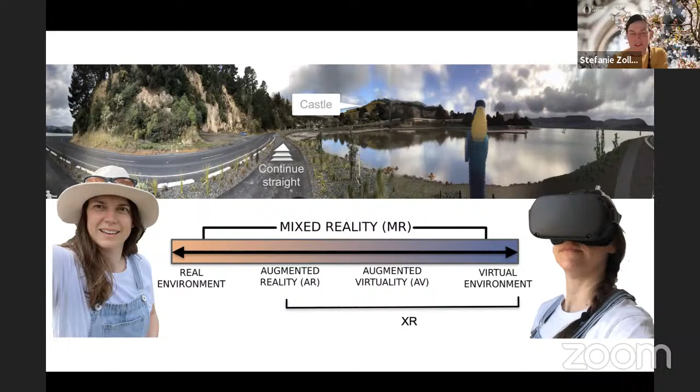Then we move further along the continuum, and here we have augmented virtuality, which is a virtual environment that still has real information embedded - for instance, videos of a real environment integrated into a virtual one. Once you're replacing everything, all the real environment, with completely virtual content, you're basically in the virtual reality, virtual environment area. We talk about mixed reality when going from real to virtual, and people often define XR, cross reality, extended reality, as the whole area from augmented reality to virtual reality. That's basically where I'm very much interested, and most of my research is in this area.

Just a couple of examples here from our very nice campus at Otago. An example for augmented reality would be: we have a historic photograph, and we integrate a 3D representation of it on top of the view of the real environment. We display this on top, which allows us to explore a location and look back into the past - that's a use case we explored here. People can walk around our campus and see how the buildings looked in the past, getting this kind of view back in time.

In contrast, if we're talking about virtual environments, we have a completely virtual representation of the environment. In this case, we have a virtual representation of our campus, and the user can navigate through this environment, maybe looking at it in a virtual reality headset, so they can't really see anything that is actually there. They wouldn't be on the campus, but based maybe at a different location, and they can still explore the virtual environment there. That's basically how we're traveling along the reality-virtuality continuum.

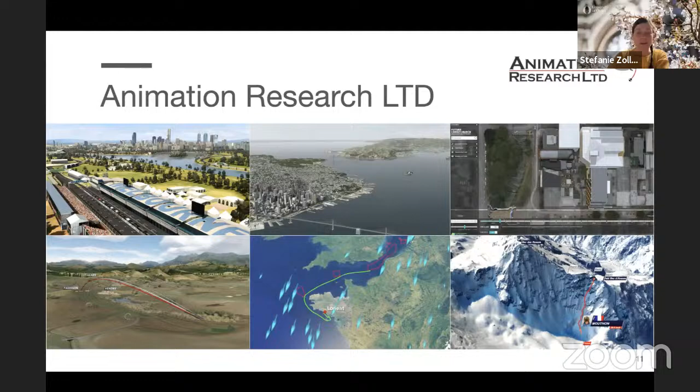For instance, sailing, lots of golf tournaments, and they're really big in cricket visualization and cricket broadcasting. So I worked on a lot of really interesting sports, doing sports broadcasting and sports graphics, and this was all broadcasting, with lots of processing happening in a post-production step, but with a very fast turnover.

When I was working for them, I worked on a project looking into how we can visualize snowboarders and skiers going down really steep mountains, which is really hard to follow live. If you're standing there as a spectator, you might just want to watch the slopes, but it's really hard to actually see where the riders are going down the mountain.

So what we were doing was equipping the riders with GPS sensors, and then using tracked helicopter footage, visualizing the GPS tracks on top, which allowed us to integrate different statistics like speeds, how steep the angles were, what kind of tracks they were choosing, and having them in a side-by-side visualization.

For me, this was really about this whole topic of how we can enrich sport broadcasting. If we look back at the past, you would maybe just watch a football game, and back then there wasn't so much additional graphics. I think if you look at the last years, what happened in terms of sports technology, sensors, and high performance computing...

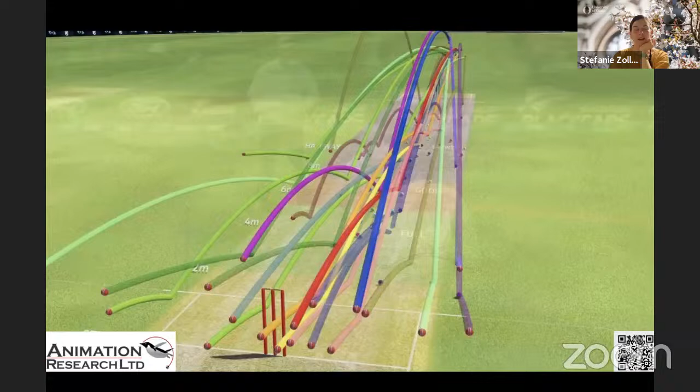How can we track a ball and then visualize this in a 3D flight path? We also looked into visualizing this in different types of arcs and visualizations, which can be quite helpful.

That's an example where this was demonstrated with some kids during a tech week here in Dunedin, where you can track the ball and visualize it directly in a 3D representation, to get a better understanding of how the actual flight paths of the balls were.

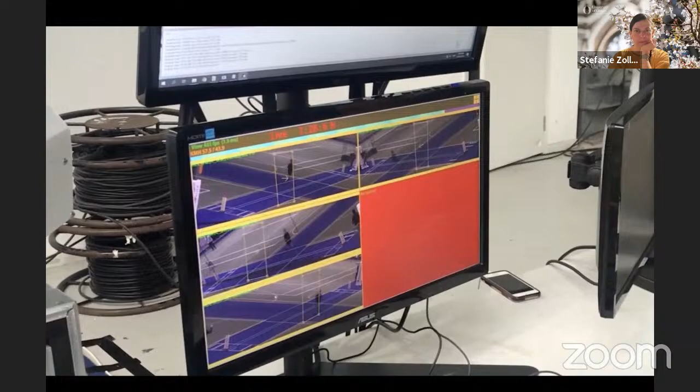So at the end, you basically end up with this kind of 3D representation, and you could compare the different flight paths here.

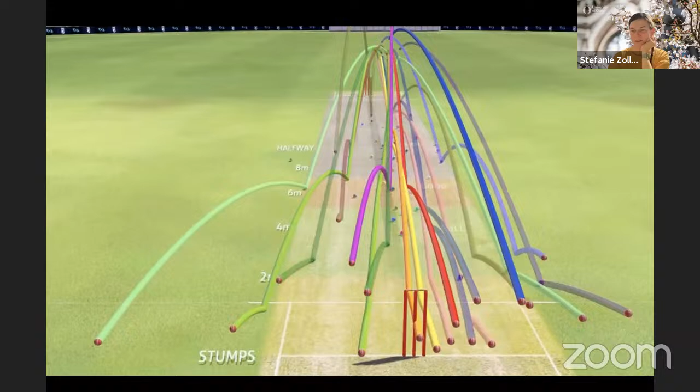So that's all broadcast, with a big focus on broadcasting technology, but I thought this also has a really huge potential for enriching live sport activities.

For instance, if you look into sports spectating, like going to a match and sitting down in the audience, often there's not a lot of additional information you can access. You might take out your phone and access box score data, but it's certainly not the same as what you'd expect from broadcasting.

For sports training, a lot of people nowadays do video training, for instance using YouTube for instructional videos. In gyms, you often have pre-captured videos that you can access remotely, from home, and then follow the instructions to get your training session.

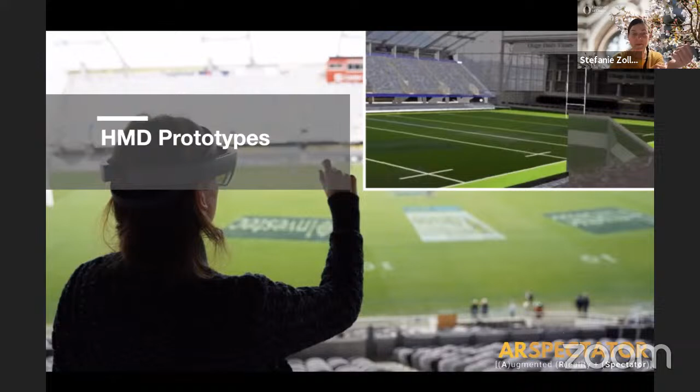We also looked into different HMD prototypes - for instance, we were using the HoloLens back then, a couple of years ago. The advantage was that we have full flexibility where the user can really move around and don't have to take the phone out, but it's still a bulky device.

For the AR training on the AR coaching project, we then switched over to the Quest 3. The first feedback we got was that compared to mobile phone prototypes, mobile phones would not be suitable, since you can't really perform all the actions and follow the instructions because you need full body movements. So for this AR training, we looked into using a Quest 3, or we also worked with the spectacles from Snapchat, which is a very nice lightweight option to integrate this into a training workflow.

This brought us to the challenges around localization and tracking problems, because we need to know where the user, or the spectator, and each of the spectators, is located within a really large environment. If you're looking into a stadium, for instance, or even a gym, it can actually be a quite big environment, and we often deal with users that are just seated.

They don't really move around a lot, which is very different from the standard use cases we have for augmented reality users, who are often just exploring a smaller space and accessing information about, for instance, a living room, placing some furniture. In this case, for the stadium, you really have to cover a very huge area, which is a big challenge for any localization and tracking algorithms, particularly because these kinds of environments are also dynamic.

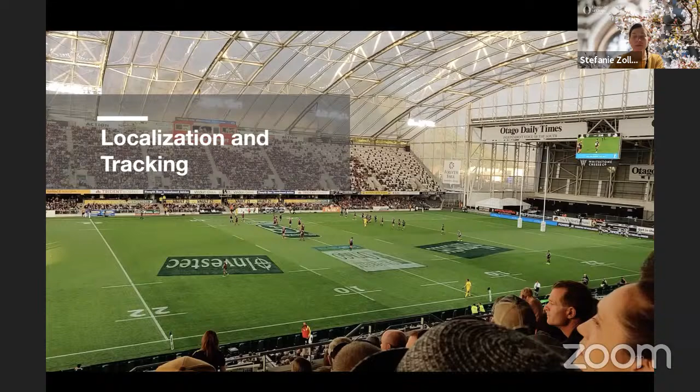And the problem here is that if you look again into what the usual movements are, we can see that there's only a very small baseline. And if you've worked with SLAM algorithms before, often the requirement is that you actually have to have a wide baseline to have a nice initialization of your algorithm, which is not the case for the use case that we are working on here.

And it's not only the case for sports spectating, but also if you look into, for instance, tourism, where people are basically trying to access information about a location, maybe some sightseeing. Often they just stay static in one position and then just move their phone around. It's not often the case that people are just browsing while walking, because it's actually a bit too dangerous.

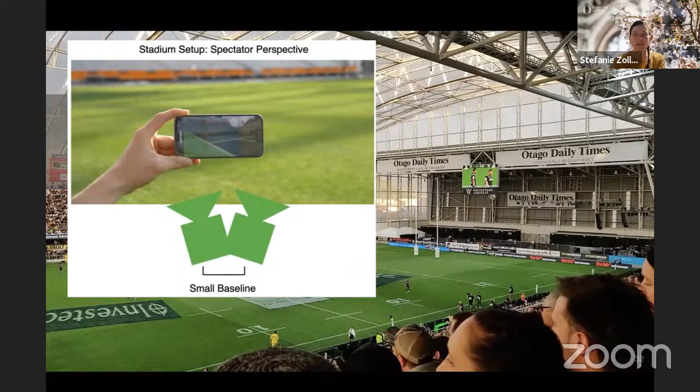So we really run into this kind of problem of having a small baseline here, and in our work we then addressed this and actually turned this kind of disadvantage of having a small baseline into an advantage, because we noticed that often users of AR applications are standing static, and then they just move around on a circle, because they often just move around their arm.

We then integrate this as a prior into our localization and tracking algorithm, basically assuming that the user is moving along on a sphere. This allowed us to implement a spherical perspective 2-point algorithm, since we know the translation is always fixed and we basically just move around on our sphere. This reduces the amount of unknowns, so we can compute good results in terms of pose data using a 2-point algorithm.

This also allowed us to implement a keyframe sphere. If you look into traditional SLAM algorithms, you often have a keyframe map that's basically unrestricted, so the keyframes can be everywhere. But in our use case, where we assume the user is always moving along a sphere, we can reduce the space to just having keyframes along a sphere, which reduces the space we have to sample and search for.

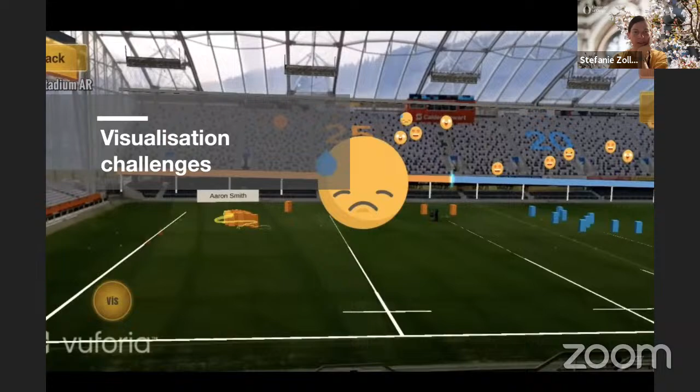Just to visualize—if we have too much going on, it could be a bit of a challenge here.

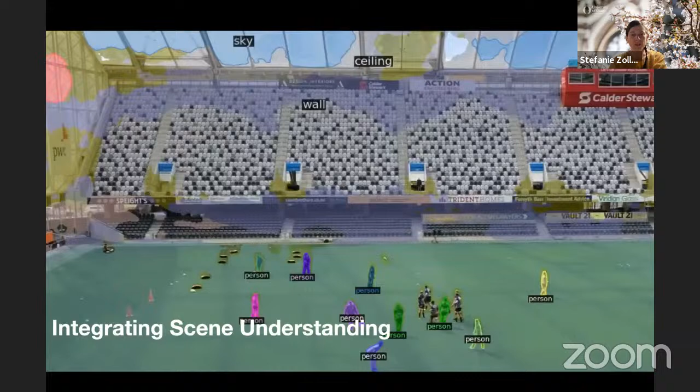To address this, we looked into situated visualization specific for sports. We try to analyze what are the best surfaces in the 3D environment of the user—for instance, the play field, but also the other spectator stands—in order to integrate additional information. We integrated scene understanding, analyzing the 3D environment like a 3D model of the event site, in our case a stadium, combined with scene understanding from the live footage, analyzing where's the grass, where are the other spectator stands, integrating this into our visualization methods to make sure we only display content where it's really suitable.

We also looked into the different types of information we can visualize. For instance, world reference data—you might want to visualize the different scores, supporting the user by showing which team is playing on which side. In addition, visualizing events and providing explanations. There might be live tracking data from the players coming through, where you also want to visualize additional information, and we try to analyze the best location for displaying this kind of content.

We also looked into combining this with more traditional visualizations that come from broadcasting, so just a 2D screen, and then integrating this together with situated visualizations that are integrated into the play field and visualized on the field and on the players.

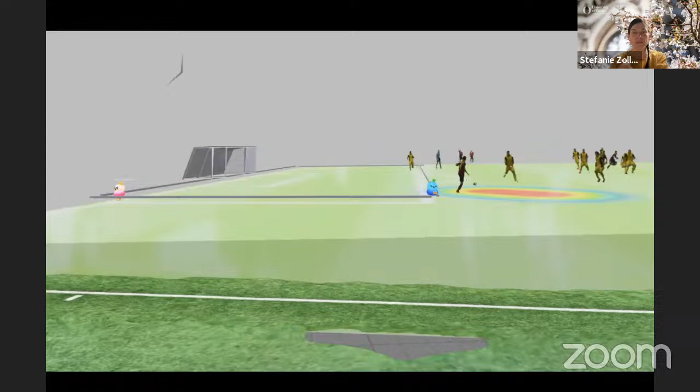We also looked into how we can visualize time and event-based data. For instance, if you have spatial information, where we often get X and Y coordinates from a game, we can visualize the events where they're actually happening on the field by displaying them in the overlay. This makes it easier for the user to understand where the event is happening.

We also looked into how we can make use of the context of the user, because often people are not just following the action on the field. Sometimes they're browsing around, and in other cases they might want additional information. You can analyze the movement behavior either by eye tracking data or by following the movement of the headset, and use this to analyze if they're more focused or agnostic and browsing for more information.

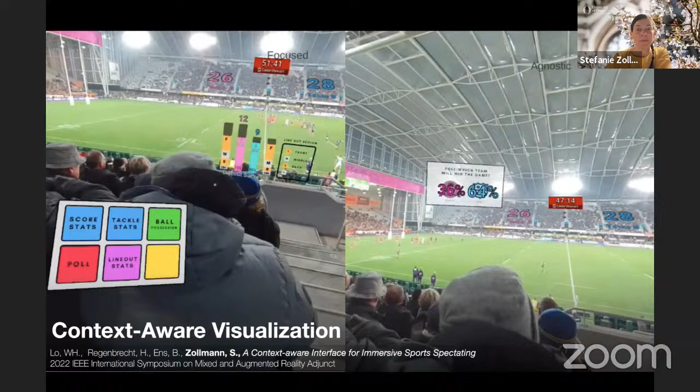Depending on this, we looked into integrating a level of detail visualization to show more or less information and make the experience more customized for each user. This is showing our level of detail framework. Depending on if they're focused, we change the level of detail and display more information. If they're not focused, there might be quizzes displayed to keep them entertained and engaged with the sports experience, similar to what we know from mobile phones.

One of the last topics I'd like to discuss is the challenge around dataset generation or capturing, and how to run experiments in these kind of challenging environments. We had to capture lots of datasets for creating our 3D environment, but also for training our networks, and then also for doing our testing.

We followed a very good plan in terms of capturing our data, making sure that the lots of different devices we used were aligned to each other, and this provided us with really good reference data that we later used for our experiments.

For the training use case, we also looked into different types of dataset capturing. In particular, we looked into egocentric versus exocentric data capture, where we looked into possibilities for capturing training data where the instructor is moving around a lot, so we can't really follow them with a camera. By having this kind of attached setup with a 360 camera, we captured footage and used this to extract a 3D avatar that was used for visualization purposes.

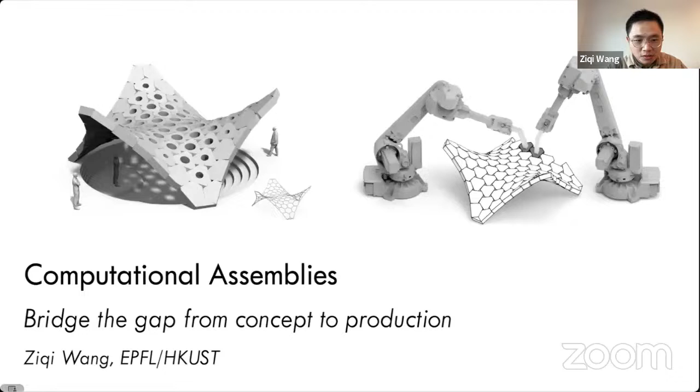Thank you very much for the introduction. Let me share my screen. I think this one is okay. Yeah, let me know if it's not. So thank you very much for the introduction again. I actually have the same surname as the host. I'm also called Wang, and my first name is Ziqi.

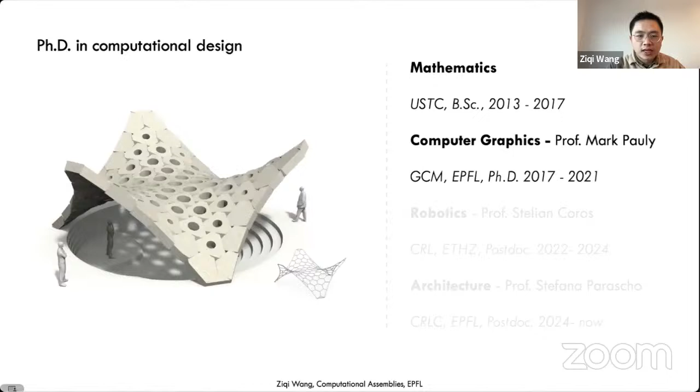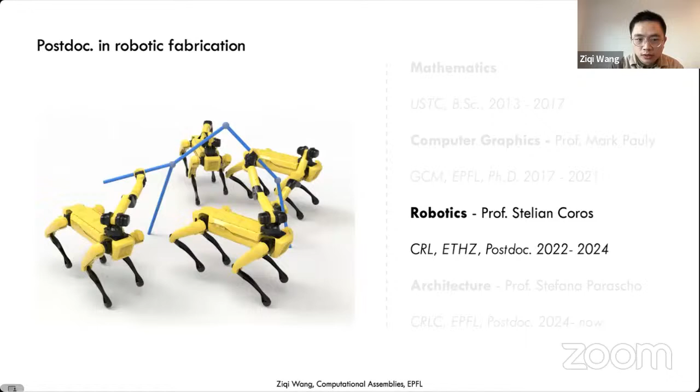Today my talk is mostly about computational assemblies. Before introducing that, I want to do a quick introduction of my education background. I actually did mathematics during my bachelor degree. I moved into computer graphics because Professor Li Gang Liu introduced me to the field, and later I started my PhD in a graphics lab at EPFL, where my professor is Mark Pauly. Most of my PhD research focused on designing architectural structures using geometry modeling methods. Later on, I realized if I can design interesting architecture buildings, can I use robots to build them? That's why I joined Professor Stelian Coros's lab at ETH to use robots for building the structures we design. To actually build something interesting, that motivated me to join a true architecture lab, also with people from controls. So I worked with Professor Stefana and Professor Maryam to apply the knowledge we learned from the past to build structures using robots. I will soon join HKUST, the Hong Kong University of Science and Technology, as assistant professor, where we want to develop algorithms for both designing and fabricating complex assemblies. So we named our lab the Computational Assemblies Lab, and we are currently looking for PhD students to work with us if they're interested in either digital fabrication or robotic assemblies, or in general geometry related research.

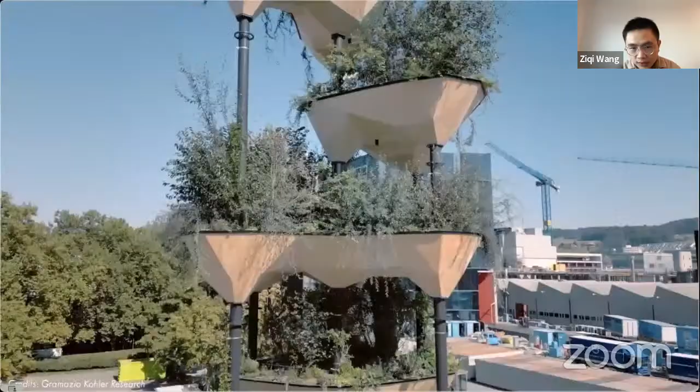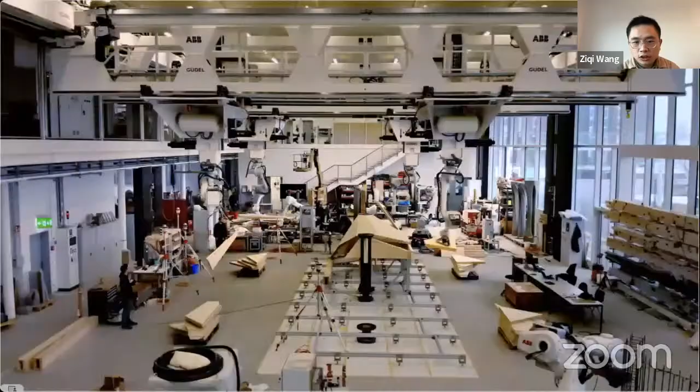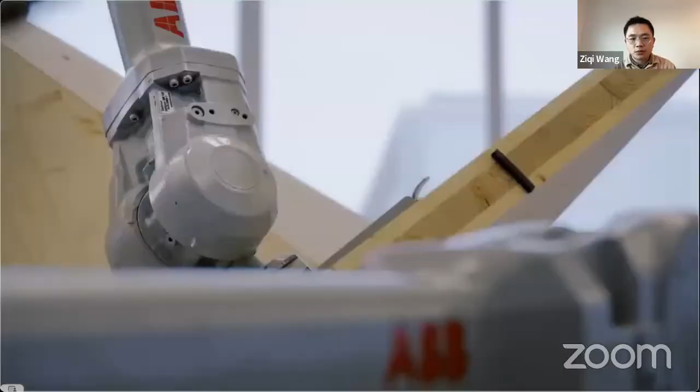So the big spectrum of assemblies that you can go from very, very small toys to very large architecture structures makes me feel interested in this field, and I've spent several years researching how to design and make assemblies.

I think the current limitation of assemblies is that most of the assembly products are made using mass production techniques, so they look very close to each other. Another big limitation is that the full potential of robots has not been fully exploited. Usually robots just do a repetitive assembly task, but they can definitely do more.

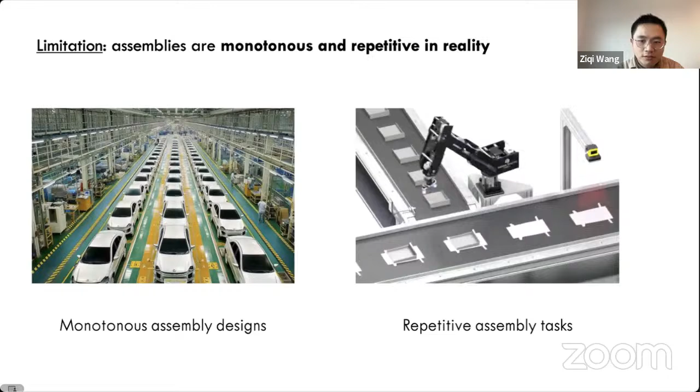That's what motivates me to do research that can encourage more customization, flexible production. So the ultimate goal of my research is to allow users to convert their high-level design ideas into a digital model using artificial intelligence, and we use robots to further materialize this digital model into physical products.

I believe computer graphics in this pipeline can provide more advanced modeling tools for the artificial intelligence part, and also can provide more sophisticated, realistic simulation tools to help robots understand the environment and be more flexible in terms of fabrication.

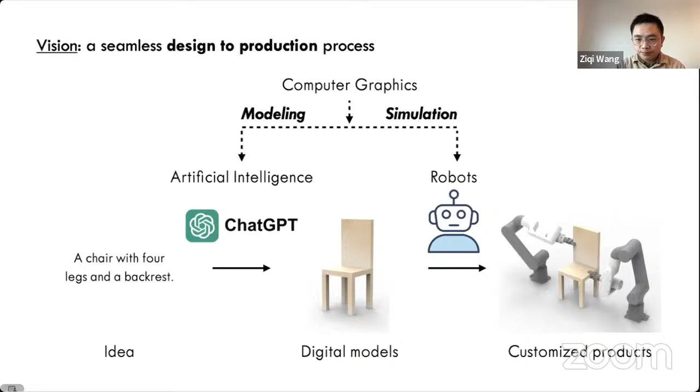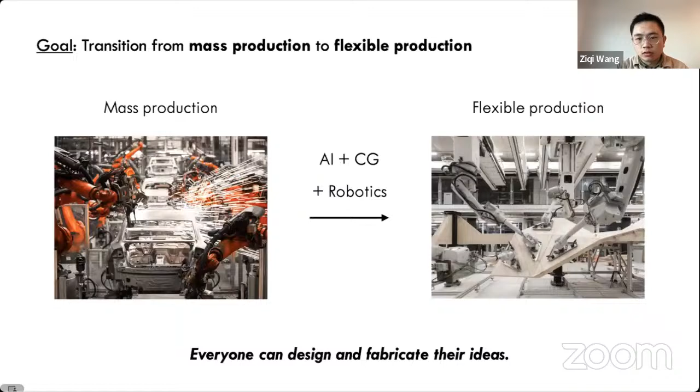So the ultimate goal is to create a seamless end-to-end design-to-production workflow so that everyone can design and fabricate their ideas. We hope that we can transform factories from mass production to more customized or flexible production. In this talk, I will briefly introduce 3 topics of my research.

The first one is mostly about modular design. A big motivation to design in modular is because to achieve customization, the cost of each of the parts plays an important role. You cannot 3D print all of them.

For example, in these frame structures done by a group from ETH, if you want to achieve these very customized, stylish designs, you need to use a lot of 3D printed joints, which are super expensive. It's okay if you do this once, but if you want to make it accessible to the general public, the price of the structure is pretty expensive.

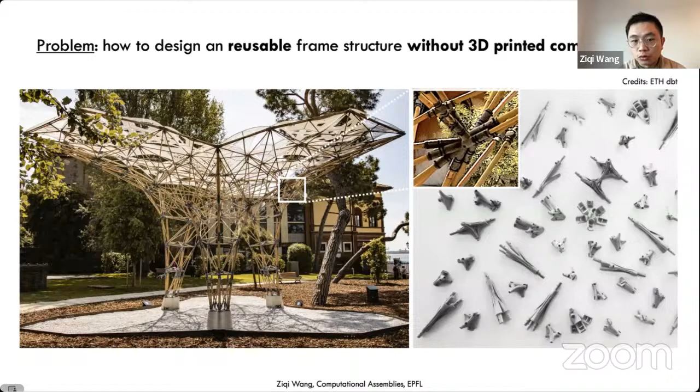That's why we think about whether we can use modulars like Legos to design but still achieve a customized structure. So in this project, we're using scaffold clamps and 1 meter long beams as the basic components of our structures.

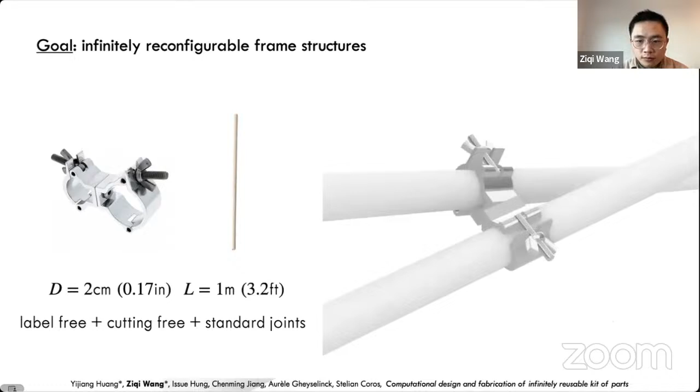Therefore, there's no labeling, cutting, or even unstandard things needed in this project. We can connect 2 beams tangentially to make a frame structure.

We also got some inspiration from traditional Chinese architecture, especially the indigenous practice in the Cantonese region, where people use bamboo beams to build a temple or a theater. But they use wire instead of scaffold clamps to connect the beams.

I think one limitation of the traditional way of building is they don't have a systematic way to design a structure. They usually pass knowledge from generation to generation. However, we want to make these things more automatic, more accessible to people without this specific knowledge.

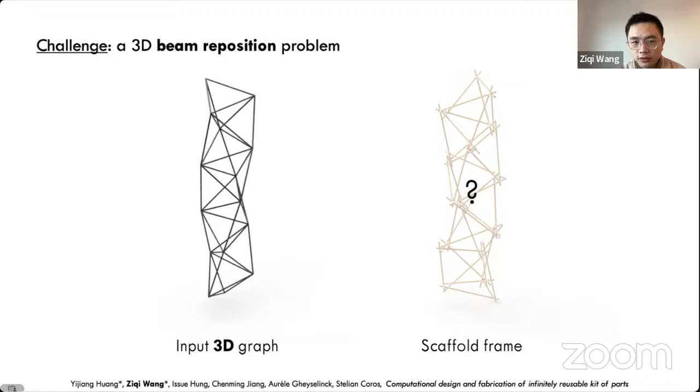Maybe in 2D it's not so obvious, but in 3D it's super challenging for designers without experience, as there are so many ways to do this conversion, but which one is actually feasible? It's a tough question. This motivates us to use numerical optimization to make this translation automatic.

Therefore, designers can focus on the high-level aspects of their designs, like the aesthetic of the structure, rather than be annoyed by the low-level fabrication details.

We consider a few constraints to ensure this translation is valid. First is the tangential constraint: because beams should be connected tangentially, the distance between the 2 beams should equal the gap defined by the clamps—they cannot be too far or too close. If they are too close, the beams may collide with each other, which is also not allowed. We consider this a collision constraint, and we try to avoid it.

Lastly, it's more like structure constraints. If you don't pay attention to the connectivity of the bars, some part of the structure may be detached from the original ones, making the final design unstable. So we ensure that if the beams are connected in the line graph, they should also somehow be connected in the end in the scaffold designs.

We can formulate the whole problem using mixed integer programming, but this is a very challenging problem to solve. It's non-convex, it's binary, it's mixed integer. So we propose several ways to simplify the solving, but the equations still just follow the three constraints we set before: it should be tangential, should be collision free, and should be connected at each joint.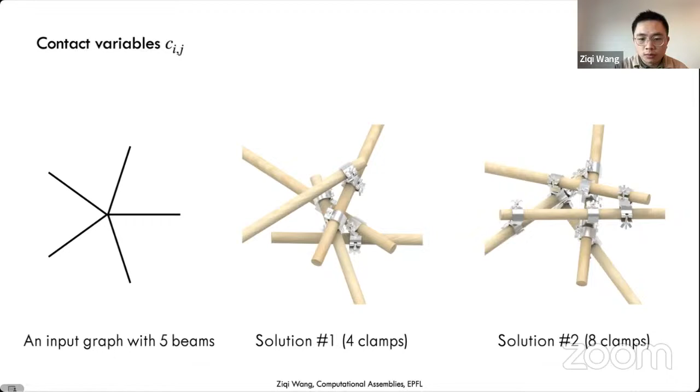One special thing in this project is that the initial design, the line graph, is actually not a good initial point for the optimization, as it doesn't satisfy the constraints. But most optimization methods, especially the interior point method, require the initial point to be a feasible point. So we introduce an additional variable called the bar radius. What we discover in this project is that the initial line graph is actually a scaffold structure, but the radius of their bars is 0, and this helps us naturally obtain feasible points for our optimization.

What we do is gradually increase the radius of the bars from the line graph all the way to the final structure with a radius of 1 centimeter. I think this is a very good way to ensure that we can use state-of-the-art optimization algorithms.

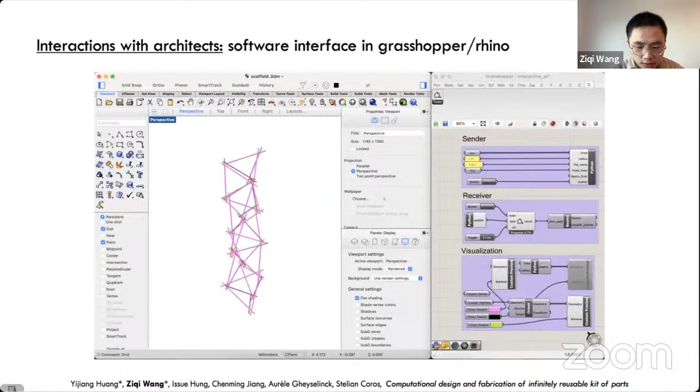Because this project is a collaboration with architecture students, we make sure that our tools can be used by them in their most familiar framework. So we develop a plugin in Grasshopper, which is widely used software in digital fabrication and more general 3D architecture domains. This allows the user to input their designs directly in this software, and our method can automatically convert this line graph into scaffold designs.

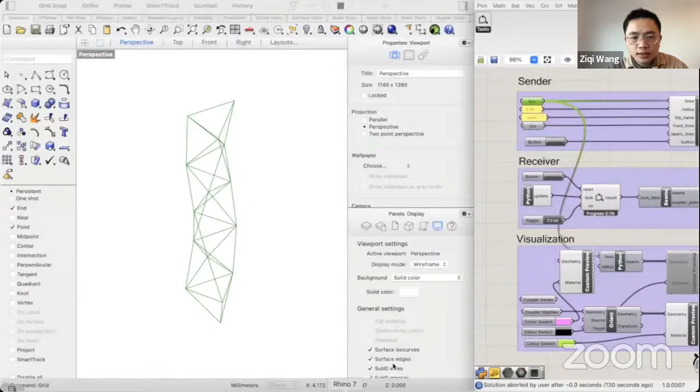and send back the data afterwards. So the user doesn't need to jump into our Python code or a very complicated software interface, but rather work within their familiar environment, which actually helps increase productivity.

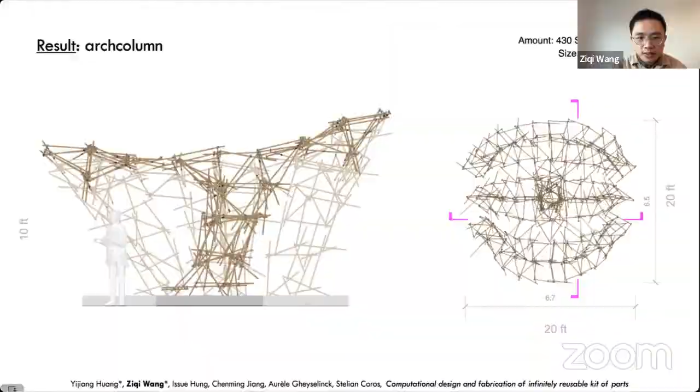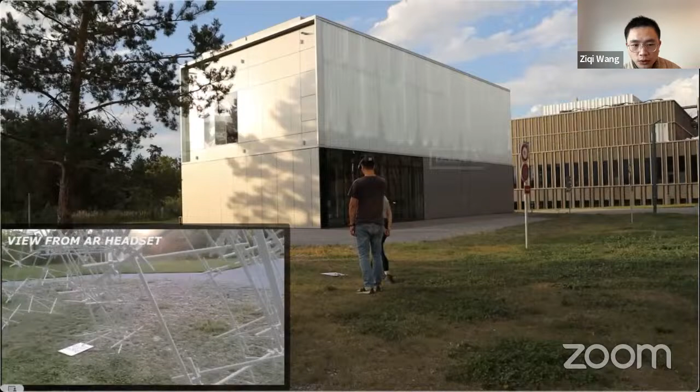As we said, we collaborated with architecture students. There are two master students doing their master thesis at ETH, and they designed two structures using our methods. Both structures actually share the same components. The first one is called archcolumn—it's a pretty big structure, 6 meters by 6 meters in width, and the height is about 3 meters.

So AR or VR actually helped in this project in two aspects. First, they could visualize the designs directly in VR to check whether the design is feasible or something needs to be changed before production.

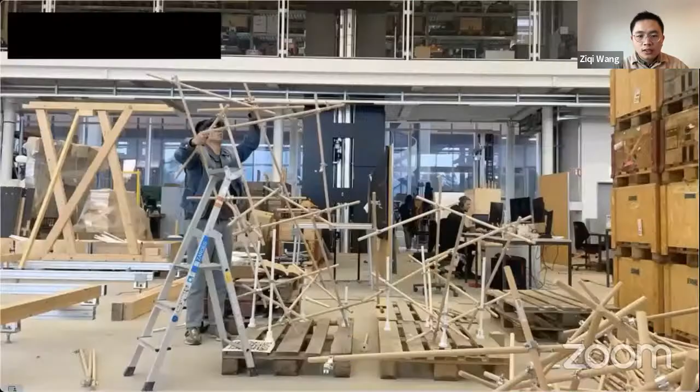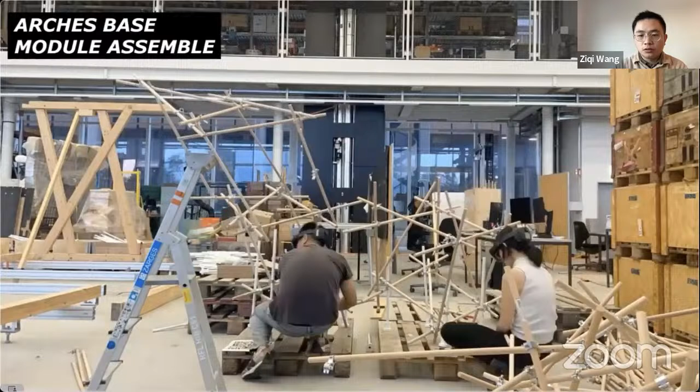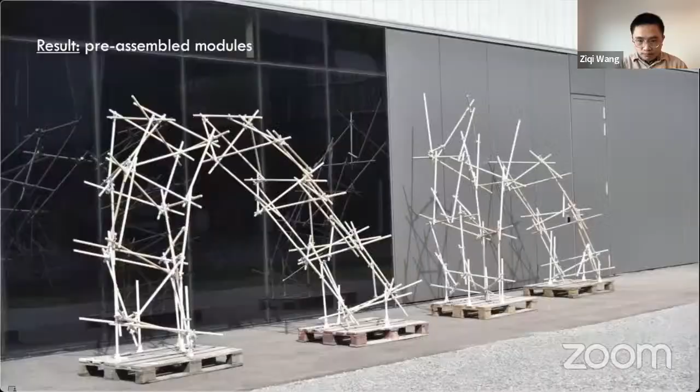The VR or AR also helps the assembly process, as it shows the spatial positions or orientation of each beam, so students can follow these instructions to build the structure. We take a modularized approach, so the whole structure has 10 modules. We can assemble each module individually inside factories or houses, then transport them to the final construction site for installation. I think the module pre-assembly time is about 24 hours, but the final combination time is just 5 hours.

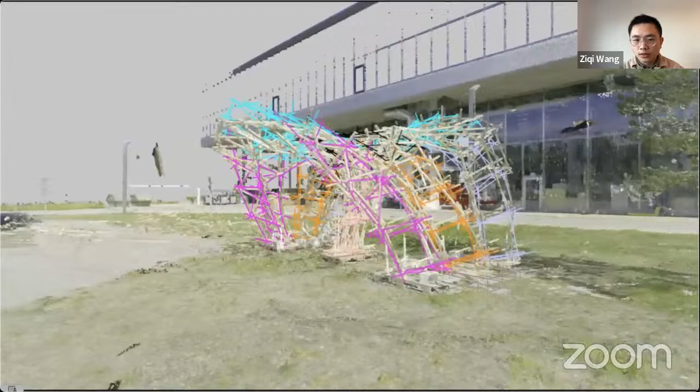We also do a scan of the structure to see how far the final result is compared with the digital designs. There are still some deviations we discovered in this project because of deformation caused by the timber materials. Timber is a flexible material that deforms under gravity, so we see a bit of deviation at the top. This is also something we want to address in the future, whether we can actively correct the errors during the fabrication phase.

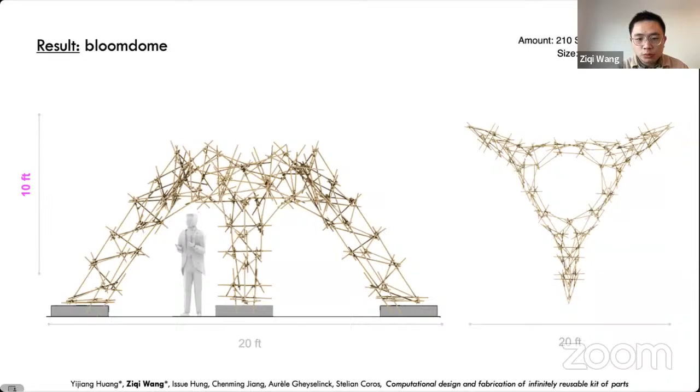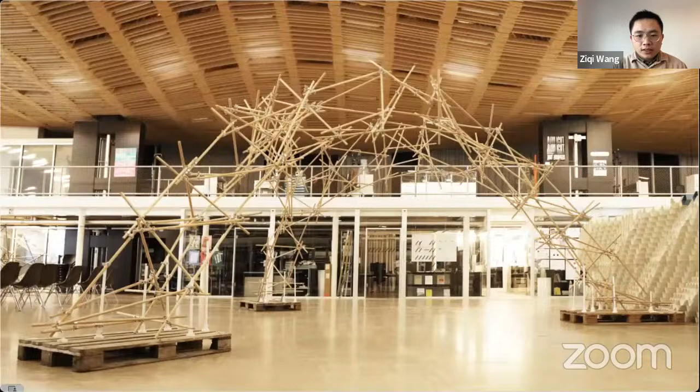We were not stopped by that, because this project is basically meant to facilitate reuse, to encourage reuse. So we actually reused all the beams and scaffolding to build another structure inside the buildings, which happened to be behind my student's master thesis defense, to give an impression to their juries. The structure is similar in size, 6 meters by 6 meters in width, and I think it took 18 hours to assemble the modules and another 3 hours to combine the final modules. This is the end of the first one.

But most of the structure is still assembled by humans, and we discovered this would motivate us to move to the second project, because during the final module combinations, the assembly is pretty difficult for humans, or pretty unstable during the assembly process, especially in large scale assemblies where the structure deforms. You have to make sure it's stable, otherwise it's pretty dangerous. So finding the optimal construction process is key, because you cannot assemble everything at once, you have to do it in steps. How to find the best assembly steps is a very interesting and very practical question.

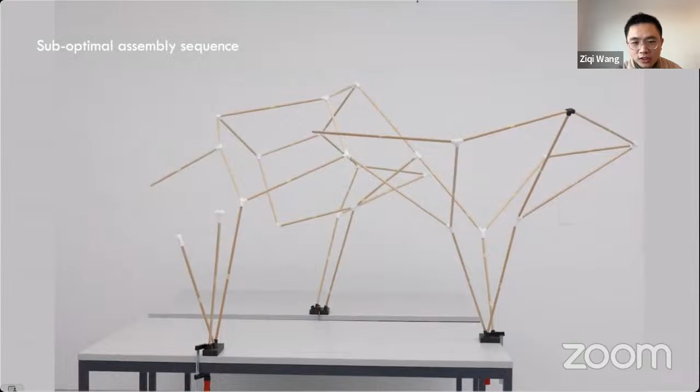To simplify the problem, we consider a more general frame structure like this one, and ask how to make the assembly easier for humans or even easier for robots. The big challenge in planning the assembly process is that the structure may deform during assembly. If you have a non-optimized structure, the deformation can be huge, which may jeopardize the structure or even cause catastrophic failures during construction.

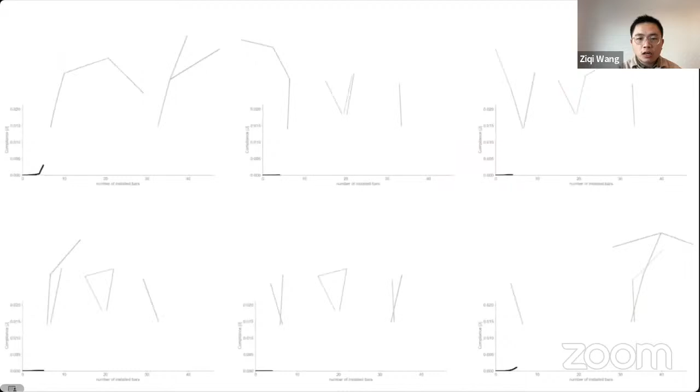That's why we want to first simulate the possible deviations during assembly. We use finite element methods to compute the internal compliance energy of the structure at each assembly step. This energy reflects the amount of deformation the structure can have; the higher it is, the higher the deformation becomes. Our goal is to find a design set, or assembly sequence, with minimum compliance energy. But the challenge is that there are so many ways to build the structure, and we need to find the most optimal ways with the lowest compliance energies.

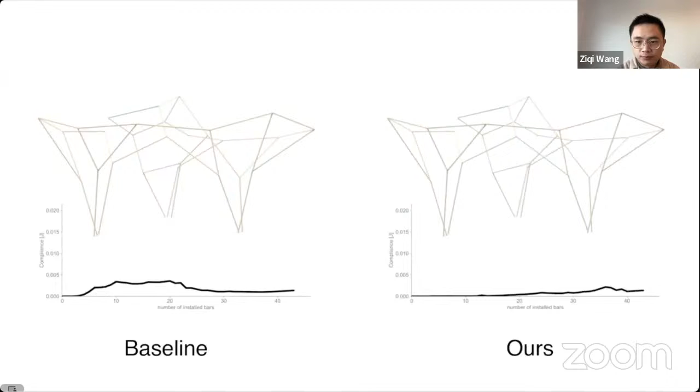For example, if you use classical assembly or disassembly strategies, you can still have large deformations, especially at the beginning of the sequence. So our algorithm allows us to quickly generate a sequence with less deformation.

I think the big contribution of this work is providing a new perspective for viewing the assembly process. Instead of thinking about which part should go first and which part should go next, we consider the design variables as all the intermediate assembly states. The objective of optimization is to minimize the compliance energy summed over all the intermediate assembly stages, where we propose an additional constraint called the temporal coherency constraint, which ensures that the previous intermediate assembly state is included in the next assembly state. Therefore, parts that have already been placed will not be disassembled afterwards. This makes sure that the final assembly sequence is valid and can be done efficiently.

The whole problem is likely a convex optimization. Unfortunately, the design variables are binary, so it becomes a mixed integer or binary convex optimization, but there are optimization strategies that allow us to solve them quickly.

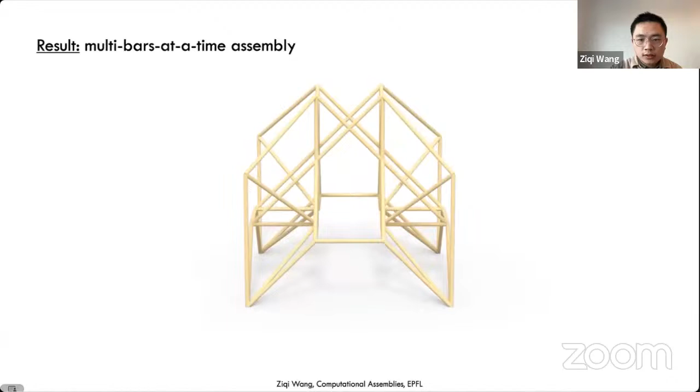Therefore, we can find a good assembly sequence with small deformations in a short amount of time using this approach. For example, we can assemble 4 bars at a time and minimize the compliance energy.

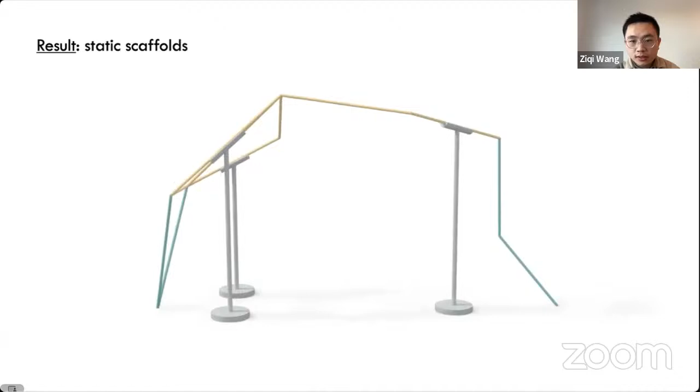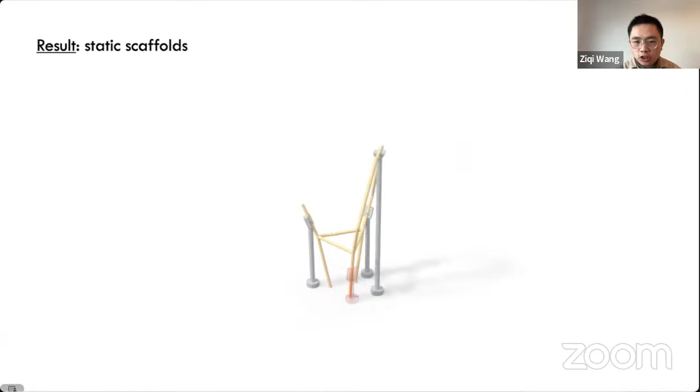We also can introduce additional scaffolds. For example, this arch uses three static poles to support the structure. Our goal is to both find the sequence and the position where the pole should support, or allow dynamic supports, which can be achieved using robots, since they can change their holding positions through steps. Both approaches allow us to save about 95% of the compliance energy compared with a sequence without using the supports.

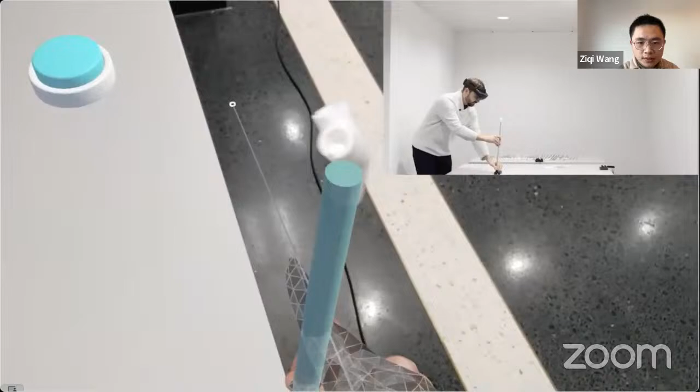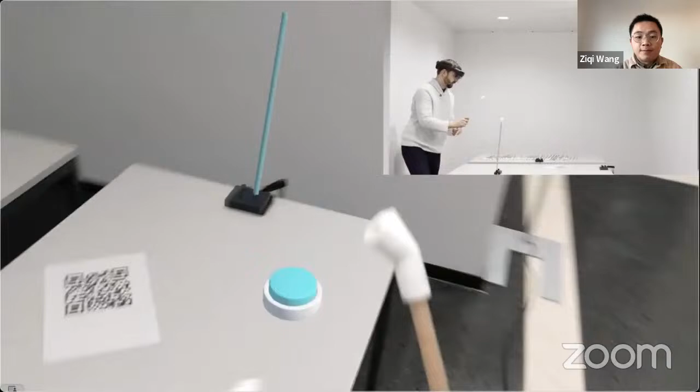We also find that AR can help accelerate, demonstrate, or illustrate the assembly sequence. In this video, my colleagues are using HoloLens 2 to visualize this assembly sequence. I think this way is more intuitive because it not only shows which bar should go first, but also shows the orientations the parts should be in, in 3D space.

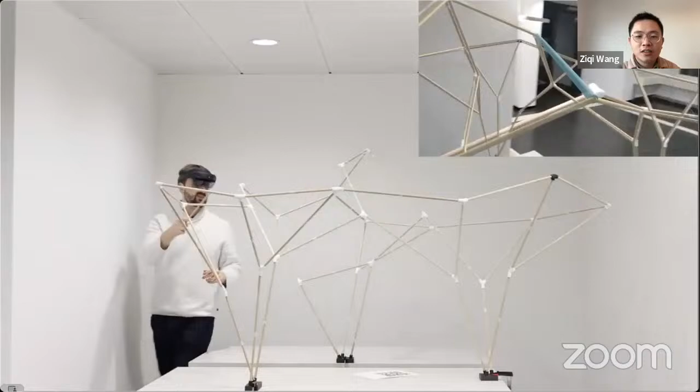I don't know whether the audience has experience assembling IKEA furniture. I think the challenge is not the parts you want to assemble, but actually orienting the parts following the instructions. This AR actually achieves this easily because it basically shows every detail of the parts in 3D space, and you can just follow these highlighted virtual models to assemble your structures.

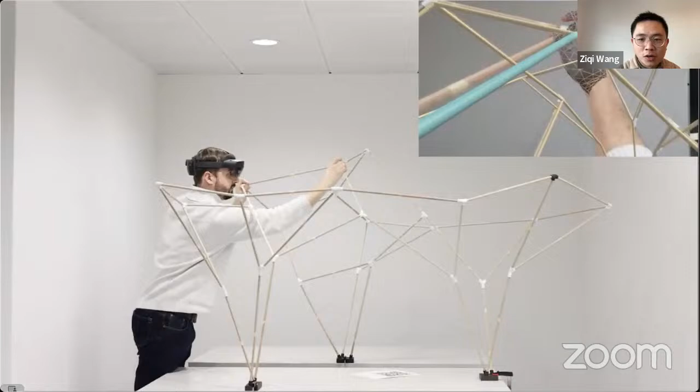So we actually achieved about 2 times the performance, or saved half the time in assembly using AR, compared without using AR.

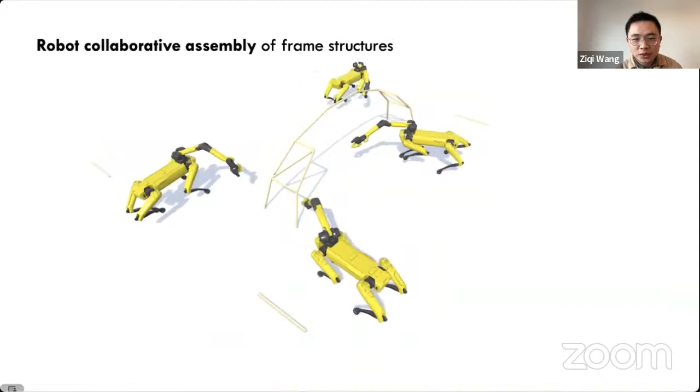Of course, we can also assemble the structure with help from the robots, and we also generated this video. We first compute the sequence using our software, then we compute the motion of the robots to assemble this arch.

The last part of the project is mostly about, if you finally build a structure, how to make it more robust by optimizing its structural performance.

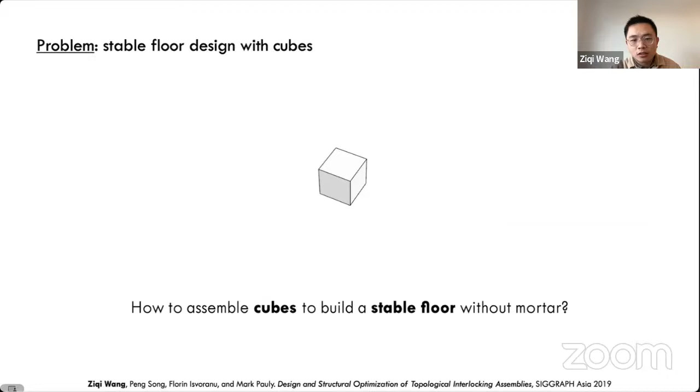The simple question for this project is: if you have cubes, how do you use them to build stable floors? This is a very interesting, also geometrically interesting and challenging problem, because even with this floor's boundary fixed, the structure is still not stable, since you can take any of the parts out, assuming you don't have any friction.

But if you do some transformation of the cubes, you can actually find good designs that are pretty stable without using any friction or mortar. You have to assume the boundary is fixed, but then if you push the parts in any direction, it's still stable.

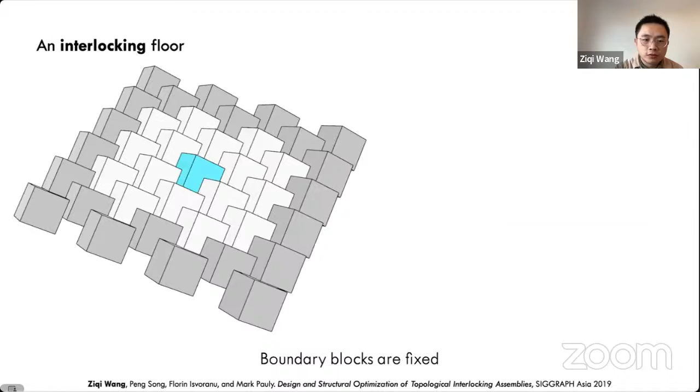The stability of the structure is because if you take any of these blue parts, for example, you will see that it's actually locked by its 6 neighbors. So if you move this blue part in any direction, it will collide with its neighbor, and this collision will propagate to the boundaries, but since the boundaries are fixed, the structure is stable in the end.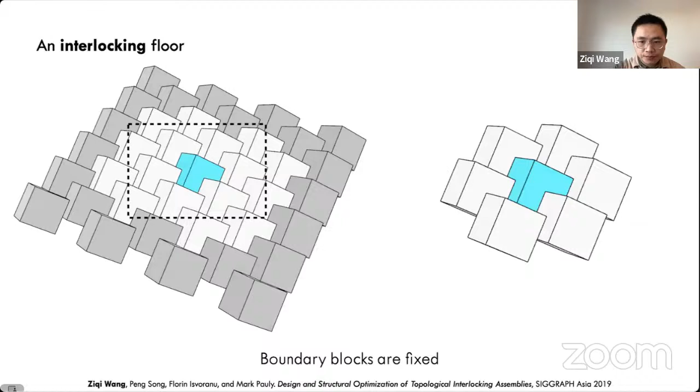There is literature that already discussed long ago using this kind of mechanism to design stable floors. But our contribution is that we can start from a reference surface, a 3D reference surface. We use 3D conformal mapping and some kind of geometry optimization to create 3D assemblies. This assembly is actually named the topological interlocking assembly, because it is stable due to its topological arrangement.

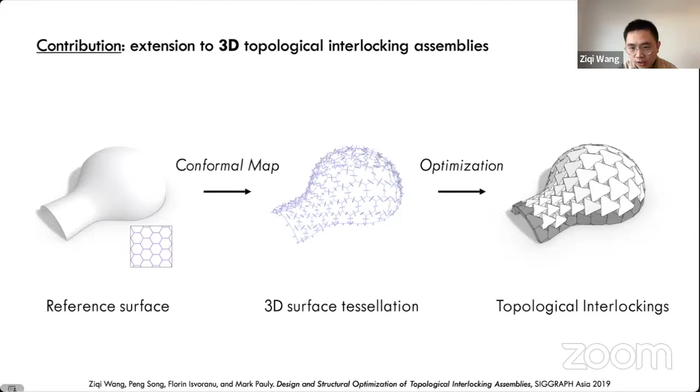So the key approach we discovered in this project is that the interlocking cube is actually oriented in a special way. Why it's oriented this way is because, compared with a regular cube, both share the same hexagonal cross sections, but for the regular cube, the cross section is oriented diagonally, while in the interlocking cube, the hexagon is oriented upwards. So if you transform the orientation of the regular cube to follow the upward direction, you get the interlocking cube.

You can actually make these whole floors by first tiling hexagonal patterns, and then putting each interlocking cube on these hexagonal patterns to create the floor designs.

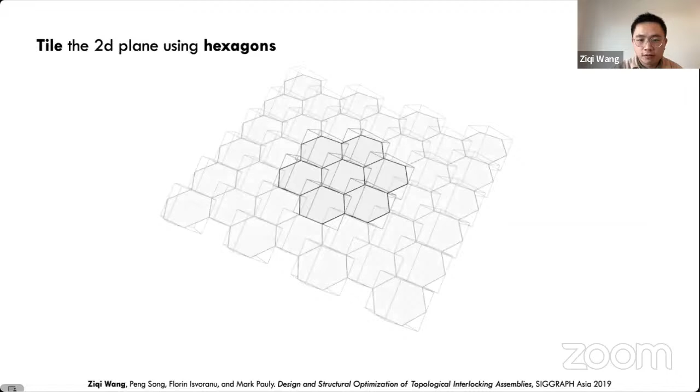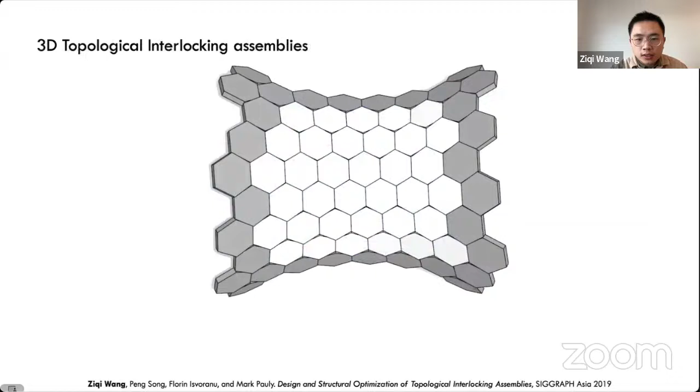For 3D, this will be more challenging, but you can still do this by first tessellating the input surface using hexagonal patterns. Then you assign each of the hexagonal edges with vectors representing the faces of each block. By varying these edges, you can get different topological interlocking structures.

This can be visualized using these animations, so we can increase the angle of these vectors to create a series of topological interlocking assemblies. But the question is whether the stability we have seen in 2D also applies in 3D, whether this dome is stable or not.

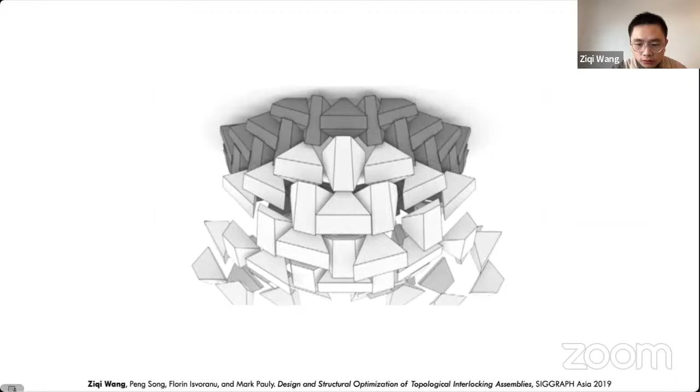This is not a straightforward or binary question, because some structures are actually not stable under gravity if you flip them, since they can move in different directions simultaneously, which causes the structure to fall down. That's why we developed an algorithm to first analyze which structure is stable and also design structures that can be stable.

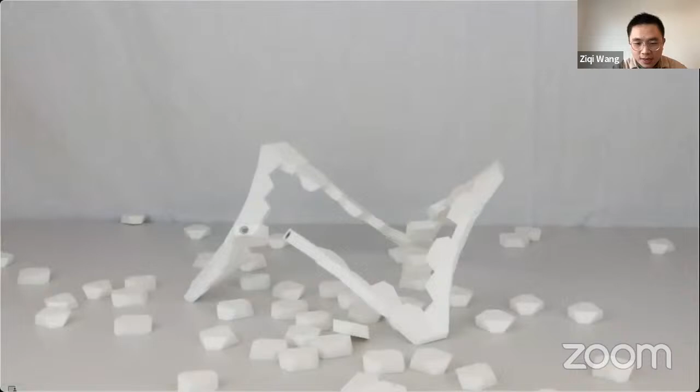For example, this minimal surface we discovered actually has the same properties as its 2D counterpart, in that you can rotate them, flip them, without causing any problem. But if you destroy the integrity of the boundary, the structure can collapse, which also indicates that we don't use any mortar or glue.

We also find a structure that can be tilted to certain degrees, like 30 degrees, until it falls. So we can optimize this ability of being tilted, which is useful for bearing force from the lateral side. But what happens if the design is not stable?

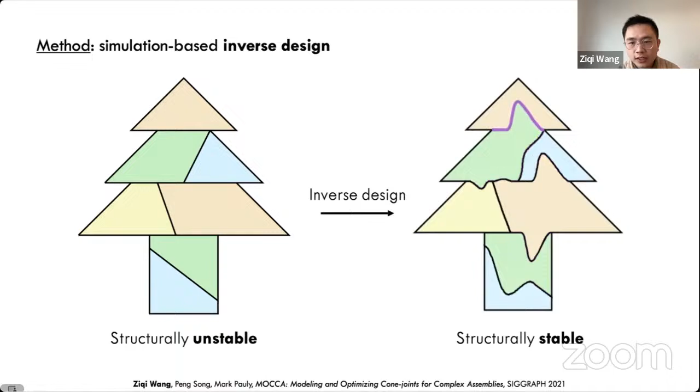We also have an algorithm that can automatically convert or find the best interface, or optimized interface, to make the structure stable. This part is called inverse design, done using bilevel optimization. The internal part of the optimization is to compute the stability, how far the structure is from being stable, and we minimize this measurement to find good designs.

The whole optimization is solved using sensitivity analysis, basically computing the derivative and Hessian of the optimization, and using Newton's method to find the optimal, stable designs.

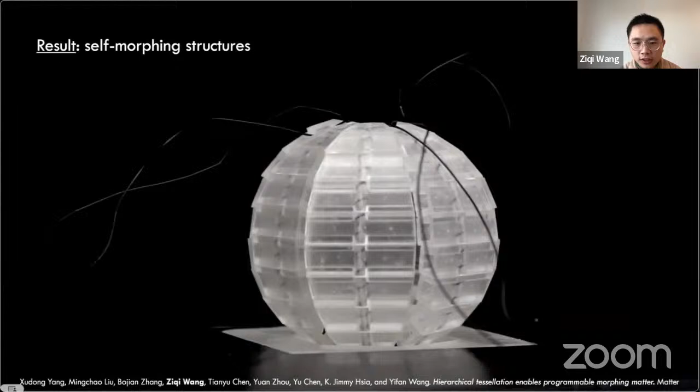This project also inspires some following research, in collaboration with mechanical engineering, so we can actually assemble the structure automatically using shape memory alloy. We place some shape memory alloy inside the parts, and when we apply electricity, the shape memory alloy will shrink, which triggers this self-assembly mechanism.

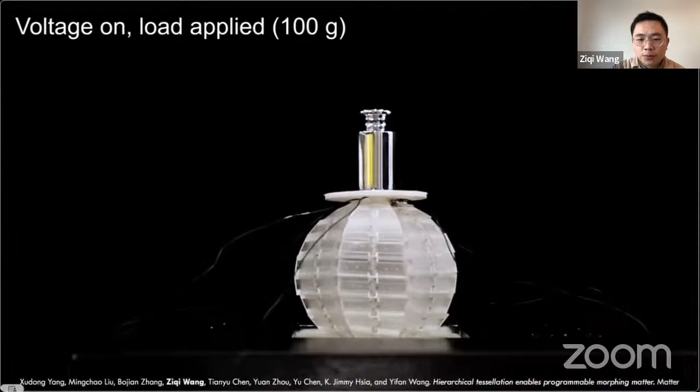Because our structure is stable when assembled, it can actually bear loads, and you can also have different shapes using this self-assembly mechanism.

Okay, that's the end of the presentation. Now for a quick conclusion.

In the first project, our goal is to reduce material costs using modular designs. In the second project, we are more interested in how to lower fabrication cost using robotic assemblies. And lastly, we enhance the stability of structures using optimization.

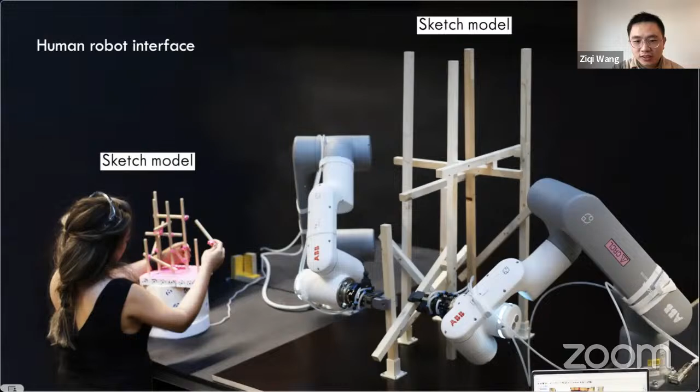Maybe a quick discussion of future work. One project we are working on now is human-robot collaboration. The human can design a small sketch model on the left, and robots can help them realize their sketch models on the right, making this translation automatic.

Another project we are working on is human-robot collaborative assembly. Humans can assemble difficult parts in the structure, while robots do more of the heavy lifting. This has actually been done recently: robots hold the big beams to support the structure, and humans assemble the small beams to finish up. The modules are assembled in factories, but installed using helicopters in mountainous regions.

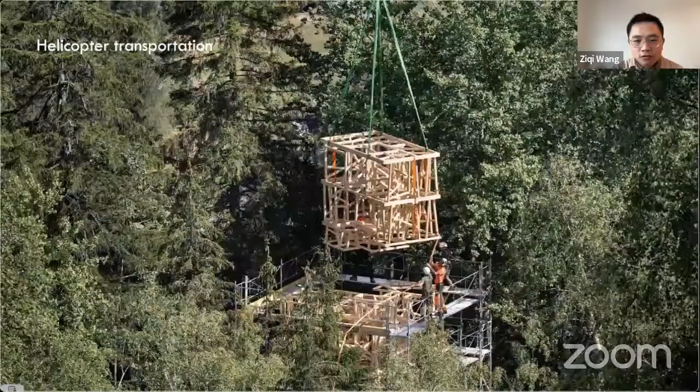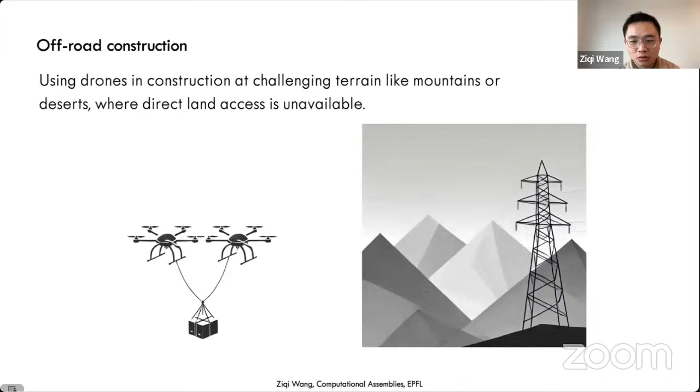This motivates us to go further in this direction, thinking about whether we can use drones to replace the helicopters, and maybe in the future use drones to help with difficult terrain construction. That's it, thank you very much.

Thank you for that, Professor Ziqi Wang. So I will ask a question: in your work, are the shapes of the modular parts predefined or post-computed? Any pros or cons for the two design approaches, the predefined parts versus parts from optimization?

So we currently fix the modules. It's like Legos, you cannot have your own Lego set, you need to use the inventory that the market already provides. So we didn't design the module parts, but the final structure can be general and more flexible. You can do whatever, but you have to use these special components. Our future research is also about how to design modules so you can reduce the set, maybe use 10 or 50 types, but cover all furniture in your home, for example.

You can use these 50 or 10 parts to build chairs, tables, all of them. How to find both optimal module components and also how to ensure enough flexibility in terms of the final structure is an interesting problem we want to achieve.